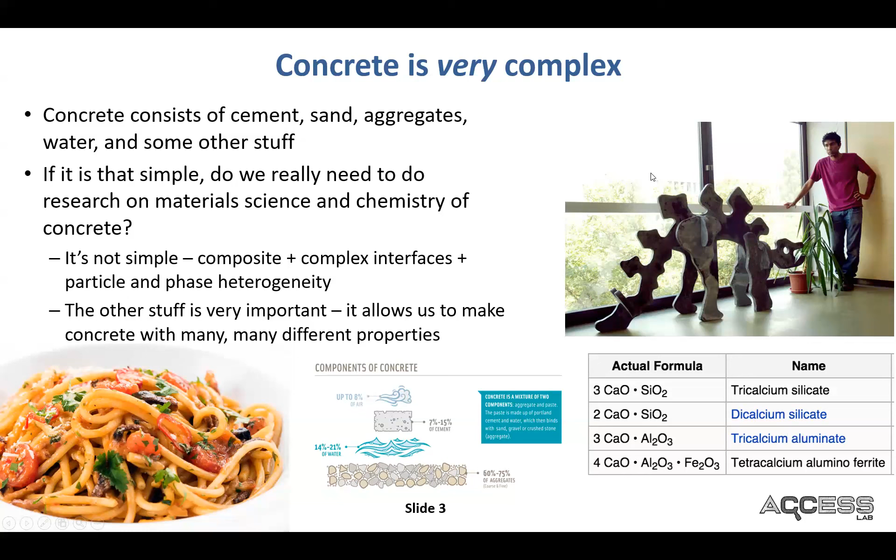The cement, in its simplest terms, is a mixture of calcium silicates and calcium aluminates: tricalcium silicate, tricalcium aluminate, dicalcium silicate, and tetracalcium aluminoferrite. This mixture of calcium silicate and calcium aluminate phases is probably the simplest formulation of cement.

So now let's talk about CO2 in concrete. The numbers I promised I'd tell you about 2 minutes ago: we make about 20 billion tons of concrete every year, and that is an absolutely massive number. And it contributes about 7% of global CO2 emissions.

So the concern that a lot of people have is that concrete is extremely environmentally unfriendly. And this is true, but this is largely because we make 20 billion tons a year of it. If you look at the numbers themselves, the CO2 emissions of concrete are about as low as they can get.

In terms of building materials, the only building materials with lower emissions than concrete on a mass basis are probably straw and stone, right? Cement does have about 10 times the emissions of concrete. And this is interesting because it's only 15% of the concrete by mass, but it's actually responsible for about 90% of concrete emissions.

There are curves like this and figures which are very common in literature, but if you look at embodied CO2 and embodied energy, again, concrete is near the lowest. You can put in 3 dimensions how the cost looks, and again, concrete would come to one of the lowest numbers. So we clearly have a material that's very low in embodied CO2, low in embodied energy, and pretty cheap. So the fundamental challenge here is how can we reduce the cement or replace the cement with something else? That's the key to reducing concrete CO2 emissions.

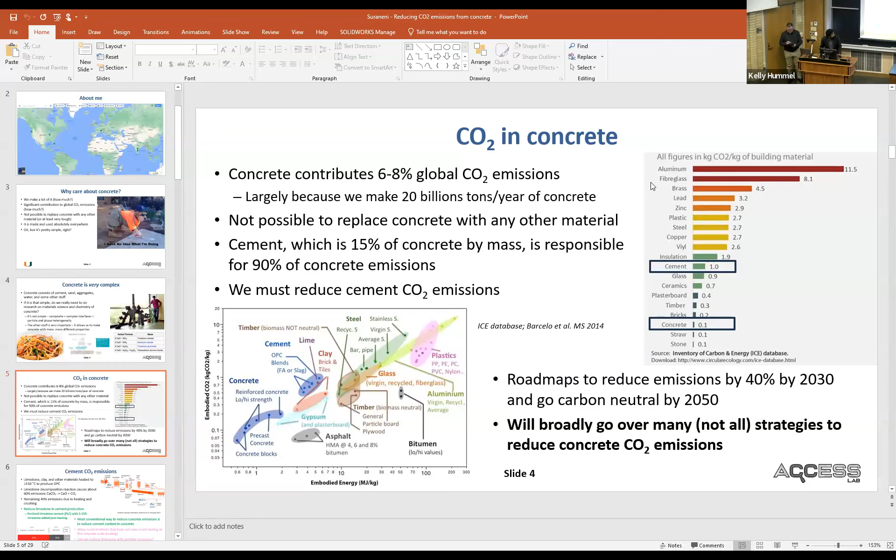So this seems to be echoing just a little bit. Just turn this off? Yeah, let's just turn that off. Okay. All right, I guess I'm loud enough. I was just joking earlier that hybrid is the worst. Maybe we mute here. Are you logged into Zoom as well, or no? Okay, try it now. This should be good now. Loud and clear? We'll take it as it goes. All right. Okay, fantastic. Thank you.

So what I was talking about was that concrete is pretty environmentally friendly, except we make 20 billion tons of it. So yeah, we make 20 billion tons of it, so pretty environmentally unfriendly, but if we can reduce the cement content, we're in great shape.

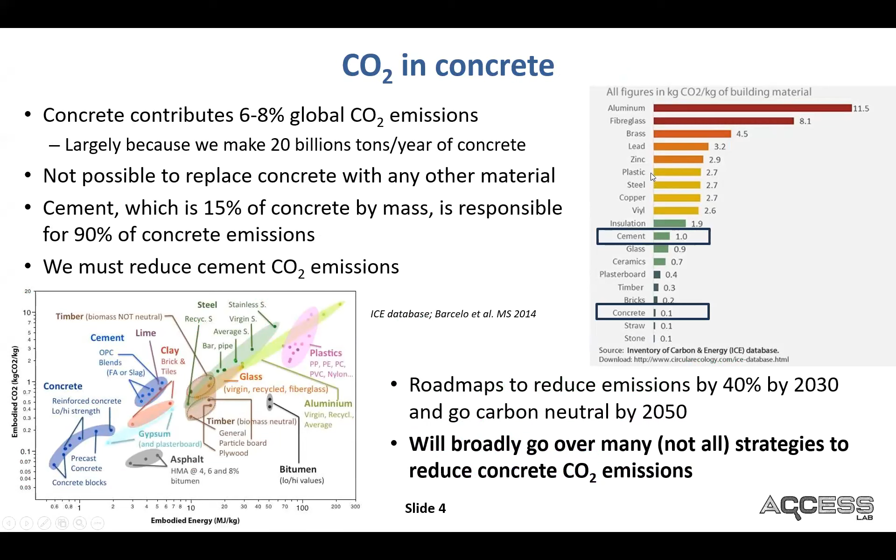So where are the emissions coming from? Cement production is actually very simple. I mean, at least there's been so much research and optimization done on it that it's pretty simple. You take limestone, clay, or other materials, and you heat them up to 1450 Celsius. If you heat limestone to over 900, typically that limestone will decompose and you lose the CO2. And you know exactly how much CO2 that is. It comes out to 44 grams for every 100 grams of calcium carbonate.

So about 60% of the emissions just come from this limestone decomposition step, right? It's not so much that you heated the cement. That is maybe 25-30% of the emissions. The remaining emissions are because of crushing, but 40% are just because of heating and crushing. But the 60%, right, is simply because you use limestone as your feedstock.

So one of the most obvious ways of reducing the emissions is to reduce the amount of limestone in cement production. A very recent technology, 10-15 years old, that has really taken off is what is known as Portland limestone cement, where you add about 5 to 15% of the limestone. Instead of adding it during the heating, you add it post-heating, and this results in about 4 to 12 or 13% emissions reductions. As we mentioned, the most environmentally unfriendly component of concrete is the cement. So if you reduce the cement content, you're good to go.

Now, there are a lot of really great technologies out there. Many of them have the drawback that they haven't been tested at the concrete scale. So we have a lot to learn about how these technologies work, what their chemistry is, what their material science is, what their engineering is. And for the most part, I work somewhere at the intersection of these three topics. So one very obvious question that everyone asks is, okay, that CO2 is not really key. I mean, that CO2 is not doing anything, right?

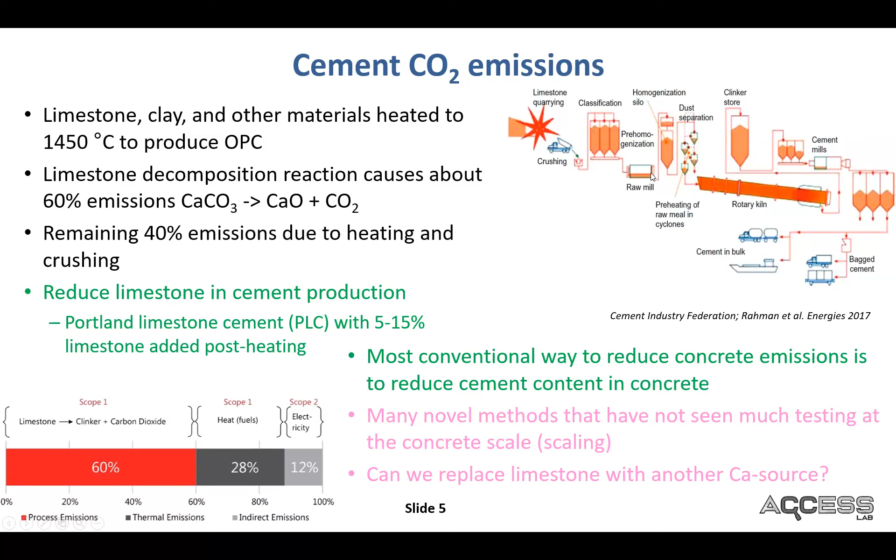So I want to cover these, which I'm going to call standard methods. By standard methods, I mean there isn't any major research or development need here. These are all very well understood in the lab, studied to death over the last 60 years or so, but implementation maybe is not quite there yet. So some of these include, as we mentioned, use of PLC, Portland limestone cement - just replacing 5 to 15% of the limestone instead of heating it up. If you add it at the end, that reduces emissions by about 10%, with really no change in performance.

A major technology is the use of cement replacements, known as supplementary cementitious materials. In principle and in practice, it's possible to replace about 60% of the cement with these. Most of these materials have emissions at most about 20% of cement, so again you get a substantial reduction, up to 40-50%. The nice thing about using supplementary cementitious materials is they improve long-term durability and performance, but there is a drawback in that your early strength is reduced.

You think concrete is all engineering, but actually a lot of nice things can be done in concrete if you're like Snape and you know your chemistry. So this is chemical admixtures - a lot of these are large-size organic molecules that act as dispersants. They could also act as grinding aids, etc. Strategic use of these various chemical admixtures can again reduce cement by another 10%. Typically, these dispersing admixtures have positive impacts on long-term concrete properties as well.

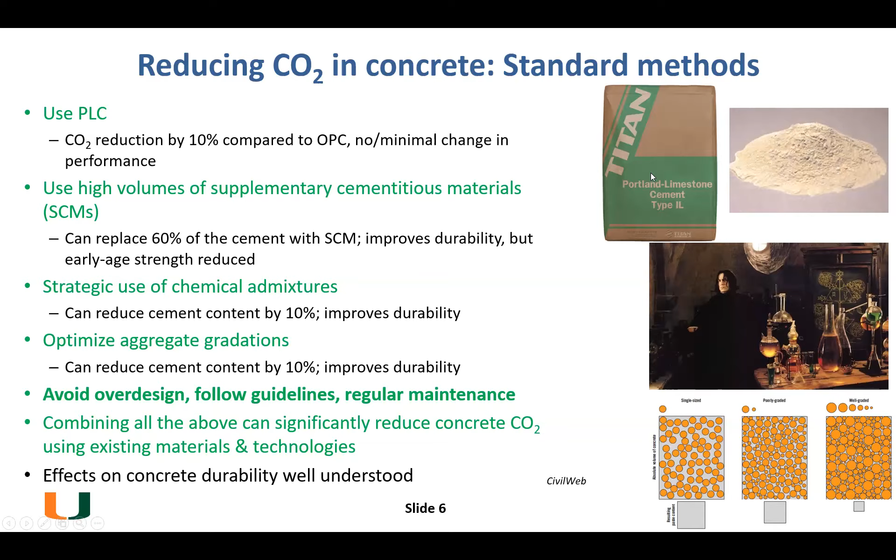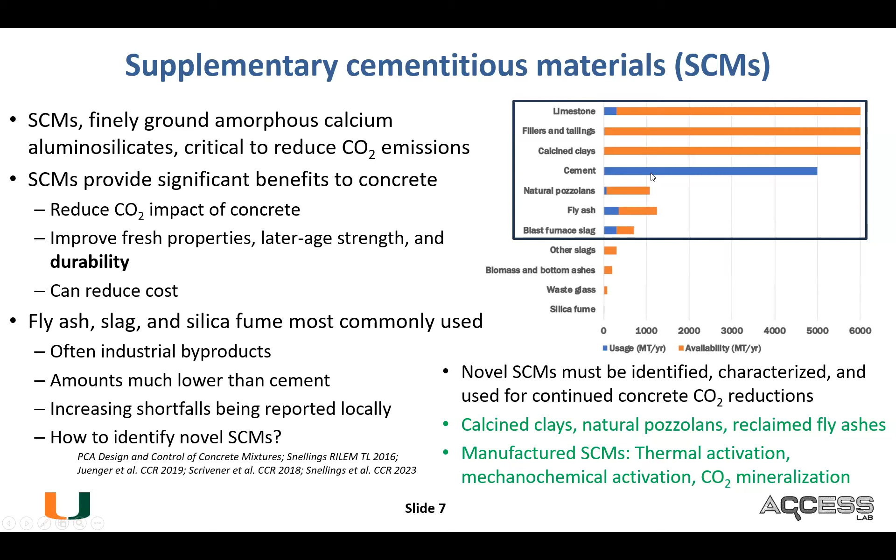For the second part, I'll talk about some technologies, and I'll put a little bit of focus on them. These are what I would call technologies where you need to do a little more processing. These are thermal, mechanochemical, and enforced carbonation techniques. Primarily the use of these is to take materials like fillers and tailings, which are not reactive, largely because they're crystalline, and increase their depolymerization or disorder to an extent which makes the material reactive. In the simplest of terms, it's just putting a lot of energy into the material.

So we talked about reactivity. What's reactivity and why is it important? Cement reacts with water very fast and very nicely. So if you take the cement out and you replace it with 40% of a material that doesn't react, that doesn't do anything, you expect a 40% reduction in performance, right?

On the other hand, supplementary cementitious materials, or SCMs, do something different. They actually have other reactions. They're not the same as the cement reactions. But because of that, if you put in 40% of an SCM, the strength reduction is not 40%. In fact, at later ages, it's probably closer to 10 or 15%. At early ages, it's a little higher. So essentially, these supplementary cementitious materials, as I mentioned, for the most part, are amorphous calcium aluminosilicates.

They're now put at high pH. A lot of people are surprised by this, but traditional cement pH is about 13. You probably should not do this, but if you want, you can look up cement or concrete burn. It's pretty nasty. Concrete will kind of eat into your skin if you're exposed to it for several hours and you don't wash it. It doesn't really happen in the US, but in some poor countries where there's really not knowledge, this can happen. It's really an awful thing. But anyway, concrete has very, very high pH, right? So at pH 13.5, silicate glasses will dissolve.

So that's the idea. These pozzolanic SCMs, that's the first class of SCMs. They react with calcium hydroxide. Largely, they're low-calcium materials. At high pH, they react with calcium hydroxide, and then they form CSH. CSH is calcium silicate hydrate. This is the glue of concrete. This is what holds concrete together. And then the second category is latent hydraulic SCMs. These are typically calcium-rich materials. So they're disordered enough or reactive enough in terms of the phases they have that they actually react directly with water to form calcium silicate hydrate. At high pH, they do not need CH. CH is calcium hydroxide. They can react with the calcium hydroxide, but they don't need it.

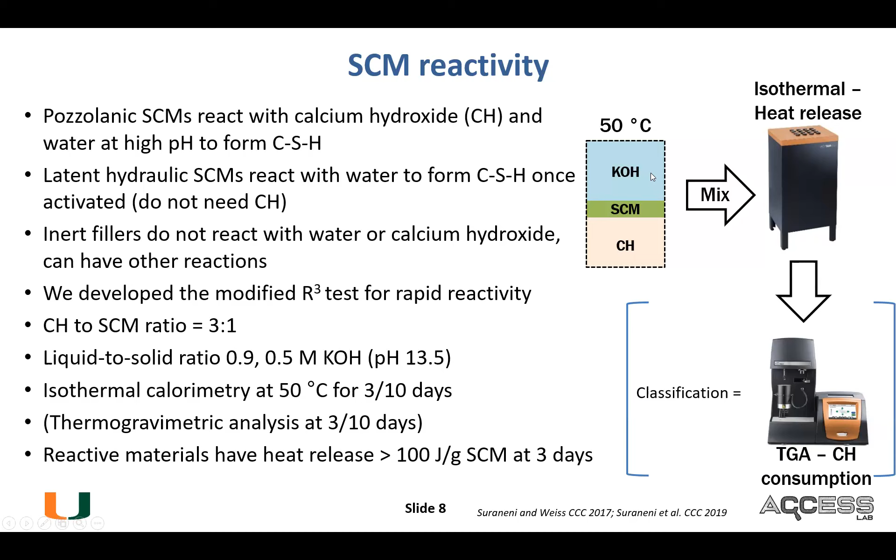So the first thing is limestone calcined clay. The idea is to replace 50% of the cement with a mixture of limestone and calcined clay. The volumes of limestone and kaolinitic clays available are billions of tons per year if you want to get them out. So the technology is easily scalable. Low and mid-range kaolinitic clays are ideal for this purpose. We're talking about kaolin content somewhere from 30% to anything higher than that. Illitic and other clays could also work, but it's a little harder and you need to do a few other things.

So most of the applications so far have been in India and Latin America. I'm almost certain this technology is going to be adapted pretty soon into the US. A lot of cement and concrete companies are looking at it very seriously. And there's really zero R&D challenges.

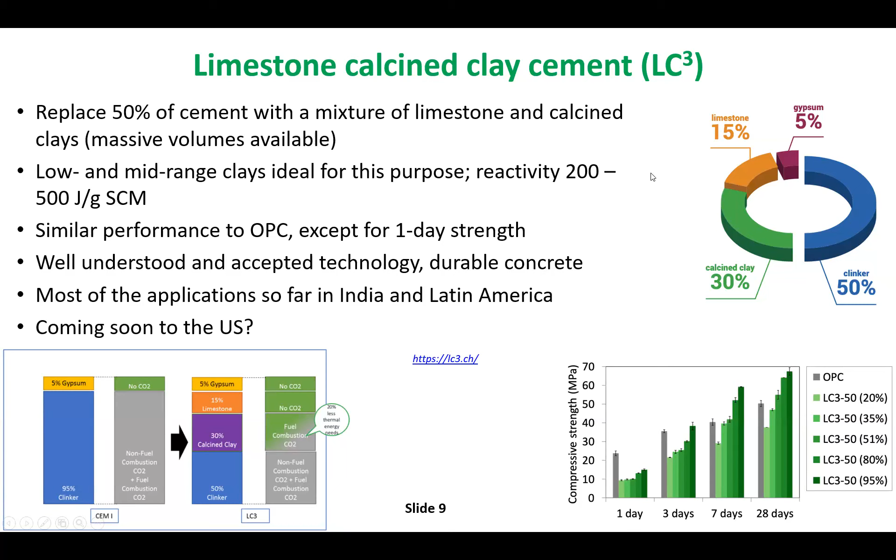All the challenges that are here are extremely applied. Basically, if you give a cement company about $70 million, maybe something like that, they're happy to make this conversion. But $70 million and increased OPEX is a little bit of an investment, but I believe the technology will come. And in terms of emissions, there's a bunch of calculations, but about 40%, a little bit here and there, emissions can be reduced by using this sort of technology.

Now, let's look at thermal activation. So you can take a mine tailing, or you can take a basaltic fine. So fines, these are crystalline materials. And essentially, if you put a lot of energy into them, that is, if you heat them to very high temperatures, and then rapidly cool them, they become amorphized. So the disorder increases tremendously. So you've taken the inert materials and made them reactive.

So this is some data from one of my students where we've done this with basaltic fines. We've done this with some blends as well. And essentially, it shows that if you go over 1200, you consistently get reactive materials. Now, why is this important? This is important because we have basalts or mine tailings, many millions, if not billions of tons of these materials available. And to a large extent, because we don't necessarily have high volume applications that can generate some revenue, they're just landfill. So you get the materials out of the landfill and you make a product that has some use and some value. Maybe these products are something that could be sold at $150 per ton, etc.

The process is not zero CO2. Obviously, there is some CO2 associated with it, but it's significantly lower than cement. And if you're running out of SCMs, you don't really have an option. So what is happening? Well, at high enough temperatures, you get bulk melting and subsequent amorphization. We've confirmed this using XRD and FTIR, and you can see in the XRD curves that beyond a certain point, all the peaks vanish. FTIR also shows peak broadening. And the reactivity is generally similar to fly ash or natural pozzolans.

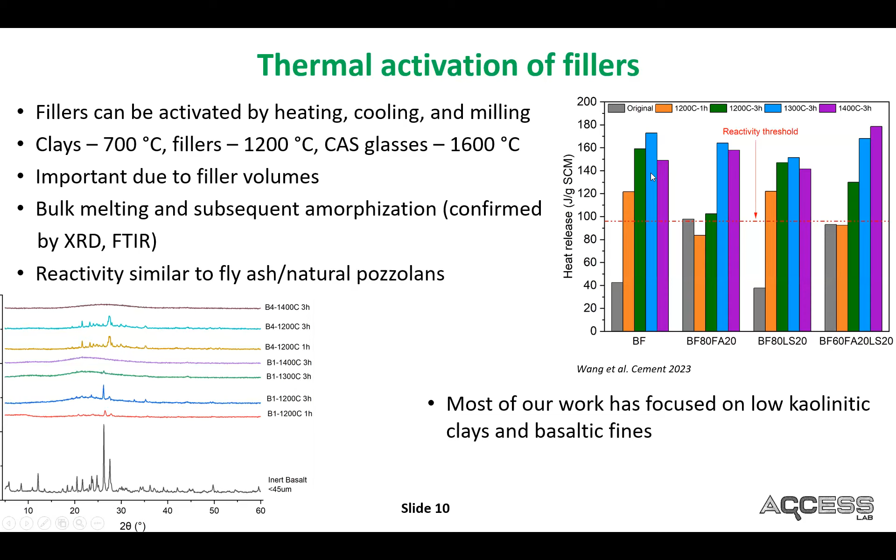So what are the unanswered questions here? This is not an idea that a lot of people have done a lot of work on. There's not a lot of research and data available. What is well known is if the temperature is high enough, it works just fine, right? Now, can you reduce this temperature? Really, heating up something to 1200 Celsius is not optimal. So can you make it lower? So here are some studies from our group, which basically show that for the basaltic fines by themselves, you have to heat them up to 1200 and cool them to get appropriate reactivity.

But if you add about 5% to 8% of some material, which I won't tell you what it is, most of you can probably figure out what it is, what happens is that we get the same reactivity, or at least more than threshold level reactivity, at 800 Celsius, right? So we have now reduced the melting temperature by 400, and I put melting in quotes because melting in glasses is a little bit complicated, especially in these heterogeneous systems. The interesting thing here is, again, those of you who know ceramics figure that this is actually very obvious. The challenge is not in reducing the temperature. The challenge is in actually understanding what is happening. What are the mechanisms of the melt itself, right?

Are we forming some sort of a core-shell structure where only the surface has melted? Is it a homogeneous melt, or is X kind of distributed in random locations and other stuff have come out of the melt? Or is it that only the finest particles, or maybe particles with very, very specific compositions, have melted? So those are the questions, and we cannot answer those simply by using bulk averaging technologies such as X-ray diffraction or FTIR. This needs a lot more work, very careful SEM, FIB, Raman, and more advanced technologies. So that's something we're working on.

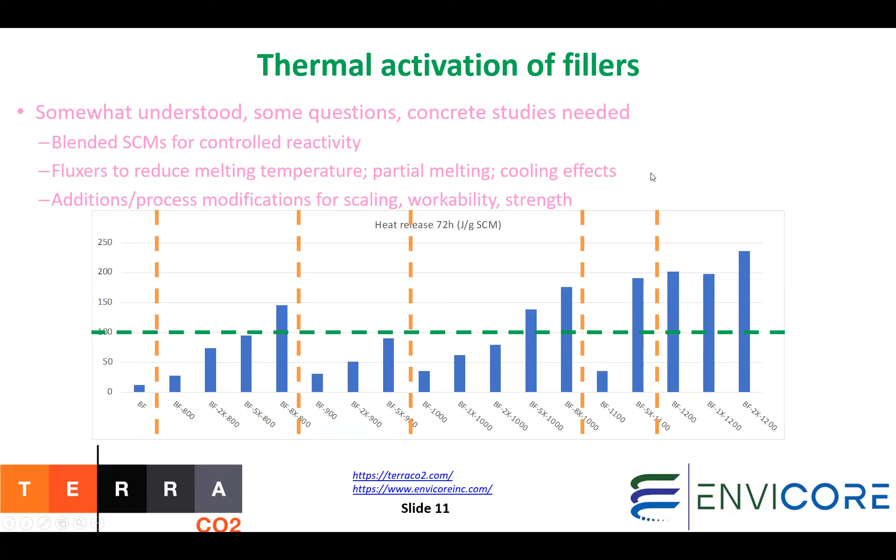So all through my presentation, I've named a bunch of startups. It's not an endorsement of the startups, but essentially, I just want to identify some of the folks that are working in this space. Terra CO2 and Envicore are using some sort of a similar technology to what I talked about. And you can certainly go look them up, talk to them, etc. Terra CO2 is actually pretty close to where we are. So if that's what you're interested in, you can do that.

Now, the second topic is mechanochemical activation. And mechanochemical activation is putting in enough energy into these crystalline materials to cause a lot of defects or to cause amorphization of the surface. And this comes about because of the friction, because of the impact, because of the high temperature that you have when you smash things together.

Most studies in literature use what is known as a planetary ball mill. It's not your conventional ball mill. A conventional ball mill is just this, right? But a planetary ball mill is more, this. I'm doing a bad job of that, but hopefully the figure does a better job. Basically, there's a counter rotation, and this actually causes a lot of tumbling action, a lot of heat, etc. So pretty high energy, and also, typical ball mills, for those of you who are aware, rarely go over 100 RPM. These go 400. I've seen higher ones as well, but the RPMs are about 4 times higher.

So fillers can be activated essentially by high energy grinding as well. We've looked at a lot of basaltic fines. We've looked at mine tailings. We've looked at clays as well. And we've actually demonstrated mechanochemical activation for 10 plus materials. Again, you get similar reactivity to fly ash or natural pozzolans. And here, the phenomenology is a little bit different. So we get increased fineness, right? We also get amorphization. But this amorphization seems to be very different from the bulk melting case, where it only really seems to be at the surface, right? But also it seems to be very, very phase specific.

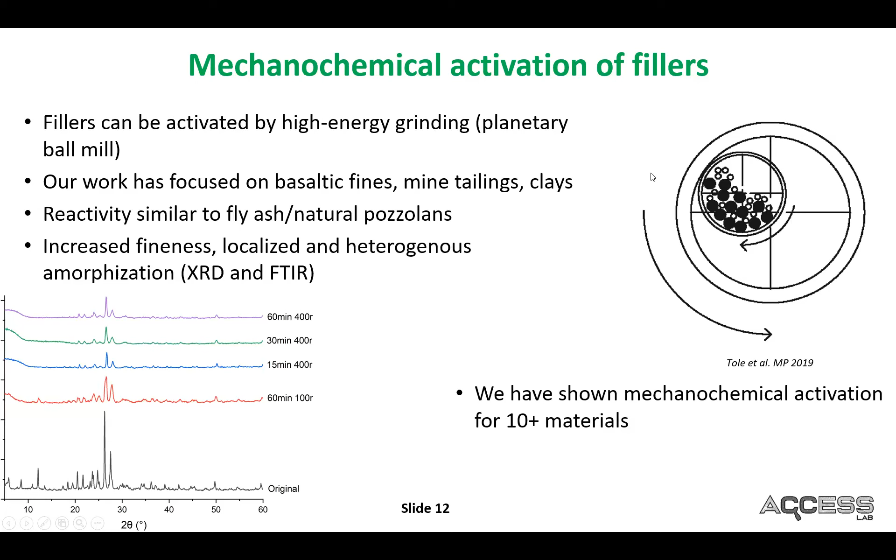And this probably has to do with original fineness, original particle size, things like that. So the fundamental question here, but also for a lot of other technologies and efforts that I'll talk about, is how do the precursor properties influence the processing parameters and the processed material itself? I use precursor kind of loosely, the chemists will probably shout at me. So it's essentially elucidating the processing-structure-property relationships in these materials, but there's a very strong effect of the precursor properties in these relationships.

So this is not really a very well understood process, at least for cement-based materials. There are many questions. I actually haven't seen almost any concrete studies on something like this. Most of it is looking at small batches, small scale, hundreds of grams of stuff. And by the way, I get people calling me all the time and saying, hey, we have 20 grams of material. Can you make concrete with that and do some testing? And the answer is no.

You're not going to do any concrete testing unless you have at least 10 pounds, but probably closer to 40 pounds of material. That's probably the minimum amount you need to actually do any concrete testing. So you can have the nicest technology in the world, but if you're only manufacturing a few grams of it, concrete testing is some time away. For this technology, for example, we can't really make concrete because we only make about 200 grams every 15 minutes. So far, we haven't even made concrete, which is similar to what most of the others are doing, or not doing.

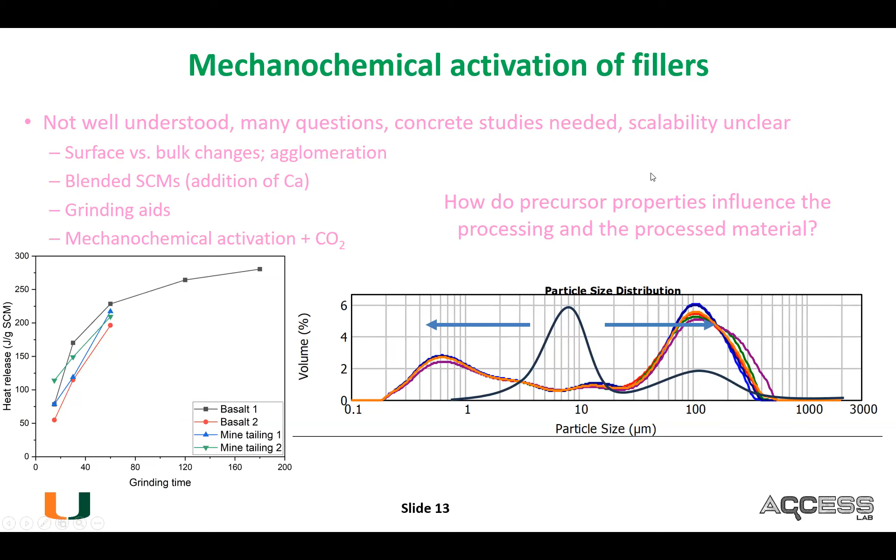It could basically be because you have almost some sort of sintering effect, because the temperatures do go high. Or, we've looked at the electron microscope, and what you see is large particles, but they're not that large. The problem is it seems to be a large particle with a bunch of small particles stuck to it, but then there's another large particle also stuck to it. Now, how easy or hard it is to disperse these particles would have a major impact, because to a certain extent, maybe that's exactly what you want. If initially that's the state of the particles, then you get an improvement in workability. But then later on, if they actually do dissolve, or the surface area is high enough, we have an advantageous situation. In fact, in several of these cases, we've seen that the median particle size increases and the surface area increases at the same time. So there are some interesting synergies here that need to be solved.

So now the next topic I want to talk about. The first section was really talking about processing of SCMs, etc. The second is about enforced carbonation or CO2 uptake. And somewhere right in between is going to be a processing technique for SCMs using CO2.

So all concrete carbonates, it's pretty inevitable. And if you think about the manufacturing process, you put in a lot of energy to get the CO2 out, some of it is ultimately going to come back in. That is pretty obvious. The process is generally pretty slow and is pretty limited. Calcium and moisture are key to this process.

There have been many, many papers that discuss what this uptake comes out to. The ones that I've seen generally agree that about 10% of the total CO2 emissions that you make from concrete can be regained over 30 to 50 years simply by doing nothing. You just have the concrete, it's slowly sorbing the carbon. It's not sorbing a great amount, but because there's, I don't know, 300 billion tons of concrete out there, it's going to keep on taking in carbon.

Now, there are many ways of mineralizing carbon in concrete. For the most part, the material you form is calcium carbonate. There are many cases where you form magnesium carbonate. I'm not really going to discuss that, but magnesium silicates are very interesting as well. It's not something I've worked on myself. But basically, when you do the carbonation, it could be completely dry, you could have a little bit of water, or you could almost do it in a slurry state. Pressure and temperature can be greatly varied. The purity and the concentration of CO2 can be greatly varied as well.

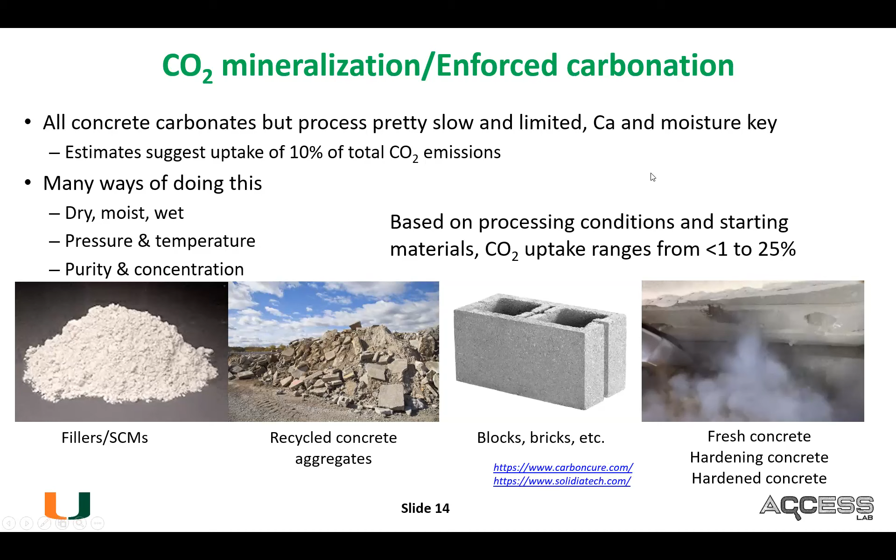Now, the first technology is forced carbonation of fillers or supplementary cementitious materials. So the same materials that I talked about, like fly ash, for example, you could just take the fly ash as is, just in a powder form, and expose it to CO2, and it will uptake some amount of CO2. The key to having a high CO2 uptake is to have high calcium and magnesium. But of course, it needs to be in a form that will actually react, because if you just take calcium carbonate and expose it to CO2 without doing anything else, absolutely nothing will happen. But if you take these high calcium and magnesium materials, if the calcium is, as an example, calcium oxide or calcium hydroxide or calcium silicate hydrate gel, they will carbonate.

I've seen studies in wet, moist, and dry conditions. But the dry typically is combined with some sort of milling or grinding process as well, like I've described earlier. So the precursor and processing heavily influence the CO2 uptake. Anywhere from 1 to 25% is possible. And also, at least in some cases, remember we talked about supplementary cementitious material reactivity. It does seem possible that after the carbonation, the reactivity increases a little bit. This could be because in some cases you form aluminosilicate gel, which is essentially amorphous silica or amorphous aluminosilicates. That's pretty reactive. Calcium carbonate also has some reactions in concrete, which makes it useful. So it could also be just that your original SCM phases are reacting.

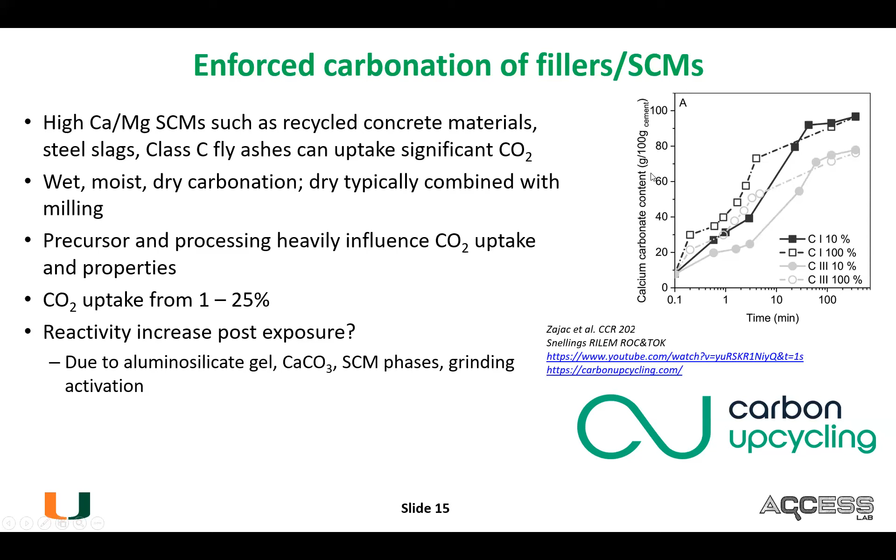So what does this look like? If you take a fly ash, this is basically the fly ash at 1 day. This is the fly ash at 3 days. And then this is the fly ash with just the mixed water. Typically calcium carbonate decomposes at about 600 Celsius, though there's a lot of variation in that. You see that the original material already has maybe a little bit of a peak here. Maybe it's an artifact, it's really very small, or maybe there's a little bit. And then at 1 day, this peak increases, as you can see here.

And then at 3 days, the peak increases significantly. But also, this is a little interesting because you almost see 2 different peaks here. So presumably, we formed 2 different kinds of carbonate. Maybe it's magnesium carbonate, or maybe it's some sort of amorphous calcium carbonate. Either way, you can actually calculate what the CO2 uptake is.

And people are surprised because they look, oh, this is a huge drop. I mean, it actually really isn't if you take a look at the numbers. This is only equating to about a 3% CO2 uptake. So there are obvious questions, right? Is it worth it to do this for 3% CO2 uptake? Maybe, maybe not.

On the other hand, this is a recycled cement paste. By recycled cement paste, I mean you mix cement and water, okay? And then once it hardens, you grind it to some sort of a 15, 20 D50, and then you expose it to CO2. So this one has a lot higher CO2 uptake.

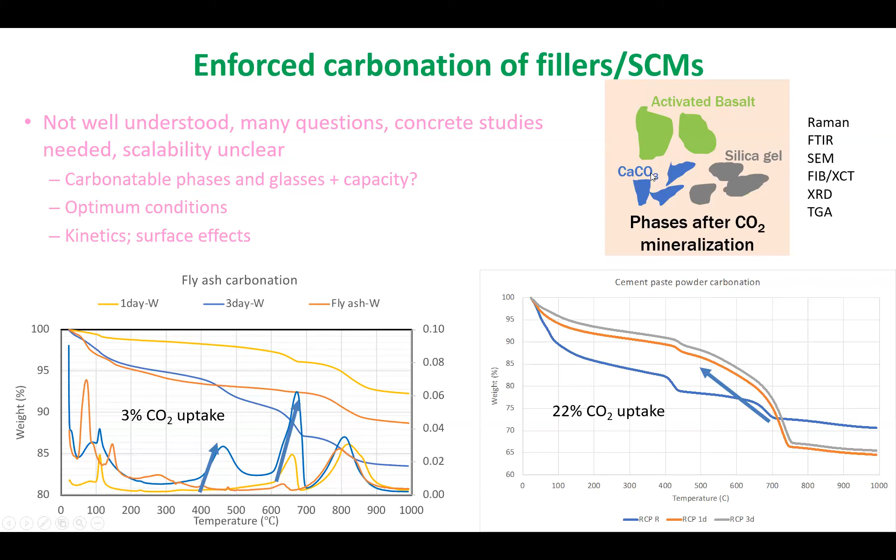So we've done a little bit of work. I mean, most of the materials, as I said, have 5 to 10%. We are trying to understand a little bit more now about the phases. The problem is, if you think about it, quantitative XRD is a fantastic technique, and it'll tell you exactly what's happening. But you already, in many of these systems, have 7 different phases. After carbonation, you form 2 more phases, right? Most of these techniques don't work when you have 9 phases which are heterogeneously distributed. So that's one of the reasons why we are interested in looking at pure phase glasses.

So you can also take the recycled concrete aggregate and carbonate them. And this has been studied for a number of years. There are really no R&D challenges. You can take any sort of recycled concrete aggregate. You can also take lightweight aggregate. Almost everyone just does moist carbonation, where you add a little bit of water. The exposure duration is a few hours to a few days.

For the most part, the CO2 uptake in this is maybe about 1%, 1.5%. Others have claimed higher numbers, and some are speaking very high numbers, so I don't know how that would be possible. In recycled concrete aggregates, you can think of aggregate with a thin coat of cement paste. So maybe they do some sort of separation technology where they remove all the cement paste, and then they separate out the aggregates, and then they expose the cement paste to CO2. I guess that could be possible. But anyway, those sort of more applied questions, there are a few of them.

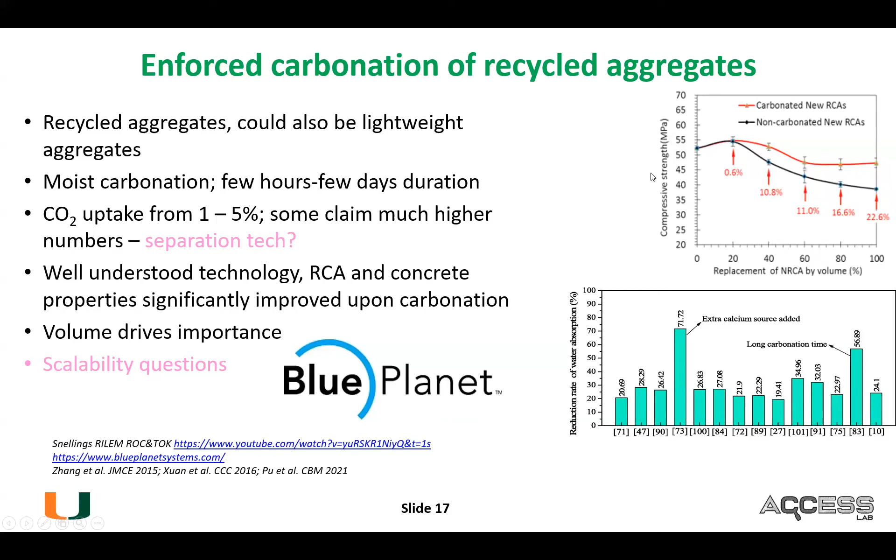But the advantage of this, even though the uptake is very low, is that recycled concrete aggregates do not have the best properties. They absorb a lot of water. They're weak in strength, etc. By carbonating them, a lot of data has shown that you improve the properties, you improve the strength of the concrete, you increase the water tightness of the concrete, etc. And it's important because, of course, 80% of your concrete is still the aggregates. So if 80% of it has 1%, that's still a pretty decent number. So most of the questions here revolve around scalability.

There's also CO2 cured concrete products. So one way of doing this is to take your normal fresh concrete and just inject a blast of CO2 into it. The uptake in this case is really pretty low. It's maybe 1%, maybe even less than that. And the claim from the startups has been that you can actually reduce your cement content by about 5% because of the formation of nano calcium carbonate phases, without actually reducing the concrete performance. So the reduction of emissions here is not so much because of CO2 uptake, it's rather because of reduction of cement content.

The second kind of technology is, as the concrete is hardening, you inject CO2 into it. And this could be concrete bricks, blocks, pavers, other products. In most of these cases, if you're using just standard concrete materials, again, the uptake is very low, less than 1%. But if you're replacing standard concrete materials with carbonatable clinkers, for example, or steel slags or recycled concrete materials, etc., in this case people have actually reported higher CO2 uptakes, in some cases up to 15%. For the most part, unless you have like 15% CO2 uptake, the performance is pretty similar to conventional concrete products. You don't really need to make a whole bunch of changes.

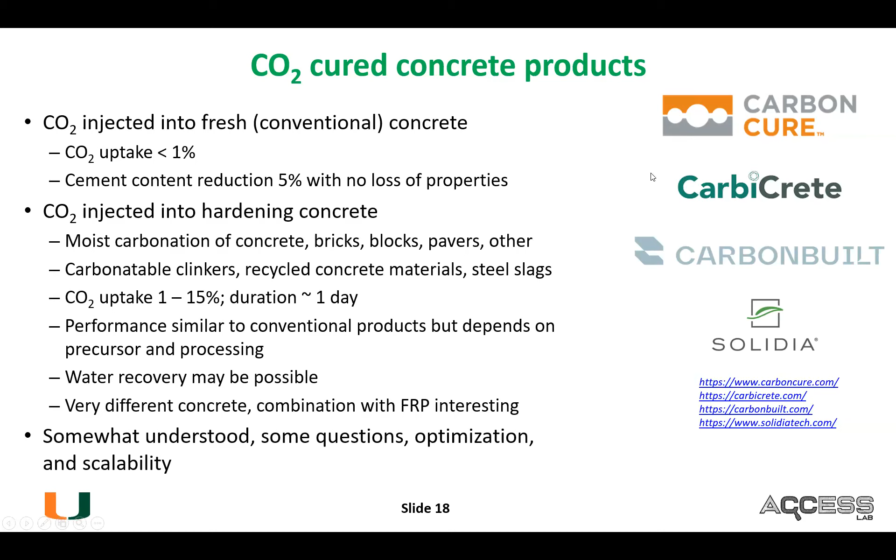A couple of the questions here are interesting. So you can take a concrete block, CMUs. I think everyone has seen concrete masonry units. And these carbonate very rapidly, okay? We've actually been able to carbonate some of them, thick sections, by the way, in 4 hours, right? This is fantastic. It's uptaking a lot of CO2, right? Well, maybe not. So that test is basically a phenolphthalein dye test. And essentially, it's a pH indicator, right? So the white portion is telling you that the concrete has carbonated, or the pH has dropped really, so the CO2 has gotten in. That is correct. But the amount of CO2, we couldn't even measure. I mean, 1% uptake is a different story, but this was not even detectable.

And it has as much to do with the limitations of some of the techniques that they're using. But very, very small uptake. So, is it possible to increase both the depth and the CO2 uptake? Maybe you'd have to use a lot of calcium-bearing materials. And some people are working on that, primarily using steel slags.

And then there's actually a major question that revolves around the measurement itself, right? NIST is doing a lot of this work, far more than me. But looking at the concrete and saying, hey, it's not pink, it's carbonated, is something people would have done 200 years ago. So can we do a little bit better? But we still have to do it rapidly. So maybe embedded sensors are the answer. Maybe you need to do some nice Raman, a lot of questions.

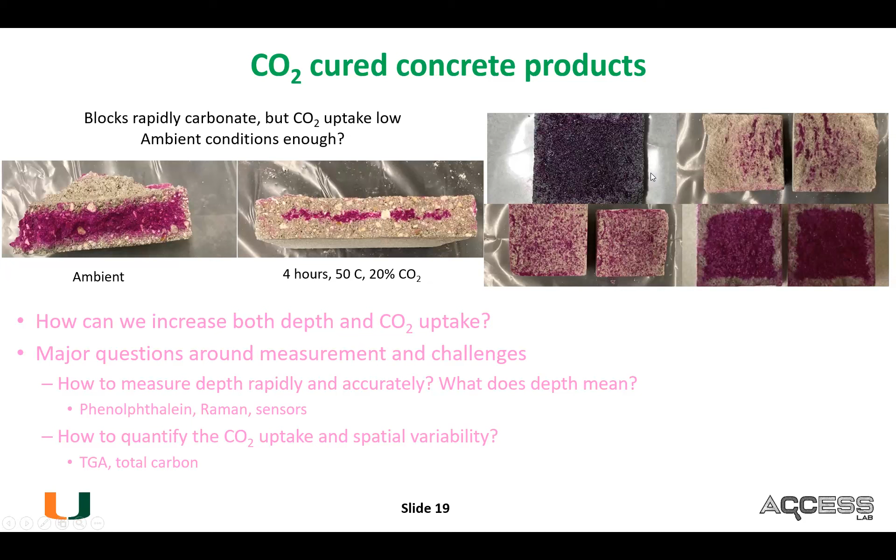So moving on from carbonation, as I mentioned to you, it's entirely possible to develop completely new cements. All of these systems basically say, hey, look, forget limestone. We're not going to heat any limestone. We're going to do something else. Could be electrochemical, could be chemical, heating, various other processes. So chemical engineers, this is where they shine, right? So you primarily avoid the heating step of the limestone. And most of the folks that do this use calcium silicates, magnesium silicates, aluminosilicates as their raw materials.

And this is the wild, wild west where carbon negative is often claimed, CO2 is often claimed. Not a lot of details are available as to what these folks are doing, which is not surprising because when you have technology that could change the world, maybe publishing is not your priority. So if you do want to, you can reverse engineer some of their stuff by looking into the patents. I prefer not to do that, but there are many people who do that. And you can understand how some of these technologies will work if you look into the patents. Bottom line is a huge amount of research is into the mechanisms here.

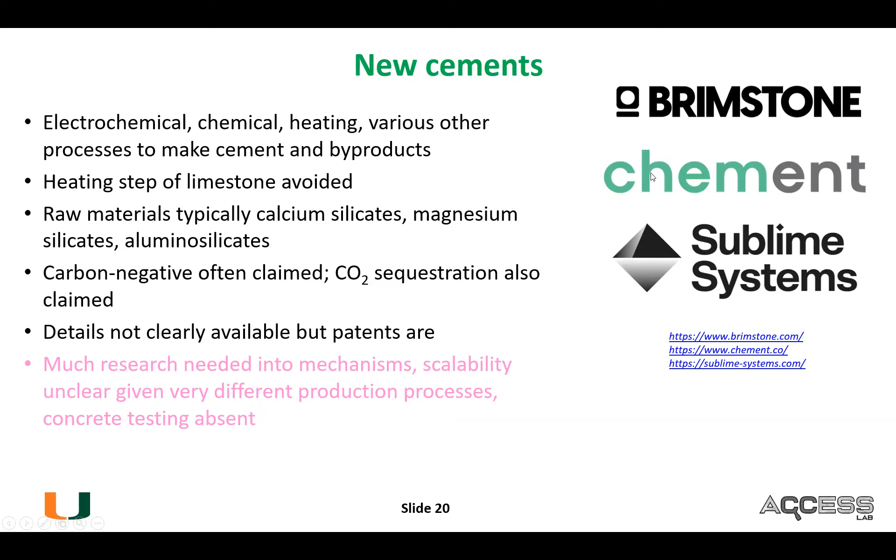Almost nothing is understood about how these materials work; the processing-structure-property relationships of these materials are not understood. Concrete testing at least is very limited, and in some cases, folks may not even have made enough material to make concrete, right? So I don't know if you've been following the news, but at least a couple of these startups have received certification, which means they can actually, in principle, sell material. So exciting times ahead, right? They could actually be selling their materials. We're making a lot of progress with them, but there are many questions.

And philosophically, I always have this question. If you call the new startup Cemex or something, Cementex, it's going to cost $1 billion to build a completely new plant that's going to make you several million tons of cement a year. Or, as I mentioned to you, to convert any existing cement plant into LC3 is probably about $70 million. So if you put in 1 billion, the volumes that you're affecting are much greater. So which of these is better? In reality, we probably have to use both of these technologies. We need to get anywhere to carbon zero, but something like this is important.

And then there's also the question of, we struggle to predict the long-term properties of normal concrete, right? How do you predict the long-term properties of these new cements, or rather the concretes made with these new cements?

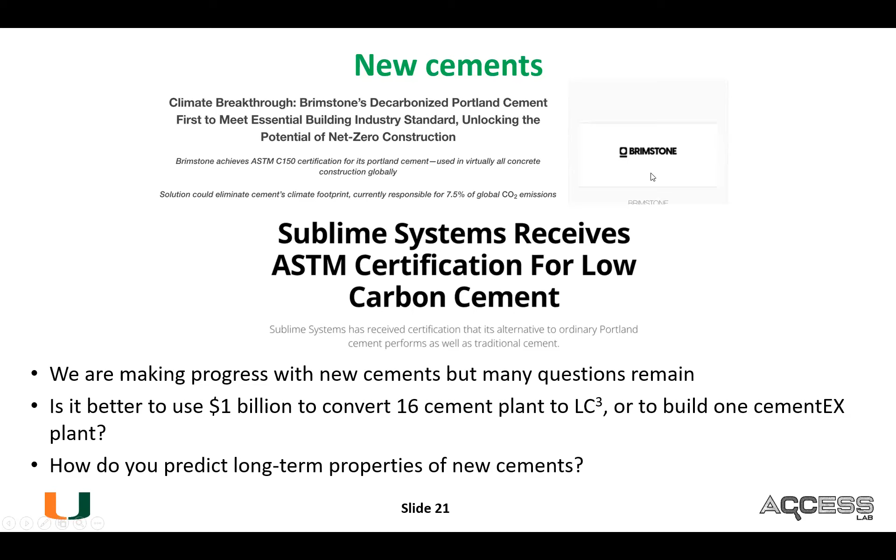So in case you haven't had enough of approaches, there's actually a lot of other things as well. Luckily for you, I won't get into the details. But people talk about bio-based cements, calcium carbonate cements, and then there's alternative cements like geopolymers, which have been around for a long time, calcium aluminate cements, etc.

There's also carbon capture that people can build into cement plants. Lots and lots is happening. So watch the space, and some news about the world's first cement carbon capture facilities there in case you're interested. Prometheus Materials, by the way, is from CU Boulder, in case that's something you want to check out.

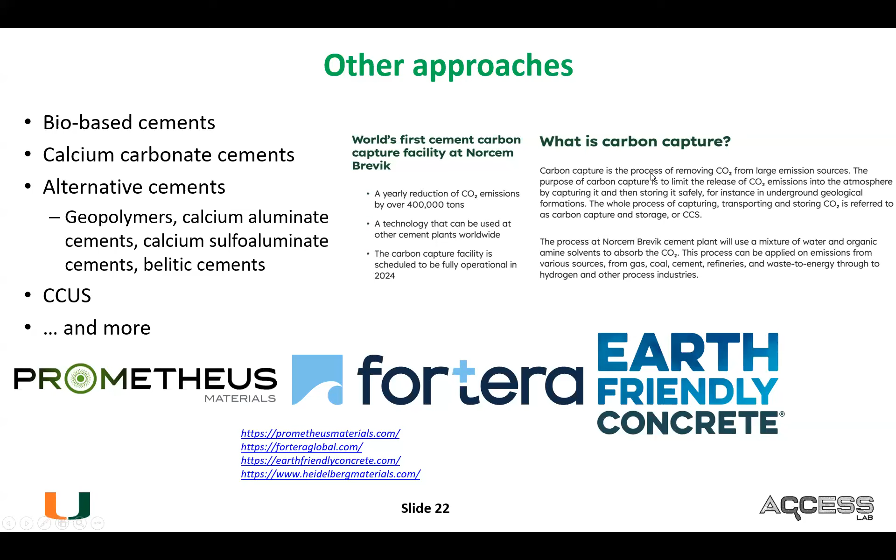All right, so those were all the approaches. And in each of them, I kind of try to highlight the research need, or I kind of dismissed it as, oh, we understand everything. Hopefully we do. But anyway, what else do we need? So I'll only talk about two things. One is model systems and synthesis.

A lot of civil engineers run the moment you say synthesis, but for me, in my opinion, this is one of the most important missing pieces here. That is that cements, SCMs, and concretes are incredibly heterogeneous, complicated. Really, nobody wants to study something that has 25 phases or 10 phases in it, right? You get far more fundamental information. Specifically, the processing structure property relationships can be elucidated for properties like hydration, carbonation, admixture interaction, organic admixtures, whatever, if you simply make simple enough model systems.

So instead of the cement, alite is actually a very nice model system, or a mixture of alite and tricalcium aluminate and calcium sulfate. Hendrik Heinz at CU Boulder has done a little bit of work on such model systems. Cement model systems have received some study. There's far lesser study on SCM model systems. So as I mentioned to you, the calcium aluminum silicate glasses, you can actually synthesize these. The method we use to synthesize is just heat them and cool them. Not trying to mimic industrial practice, but that's how you can synthesize these materials.

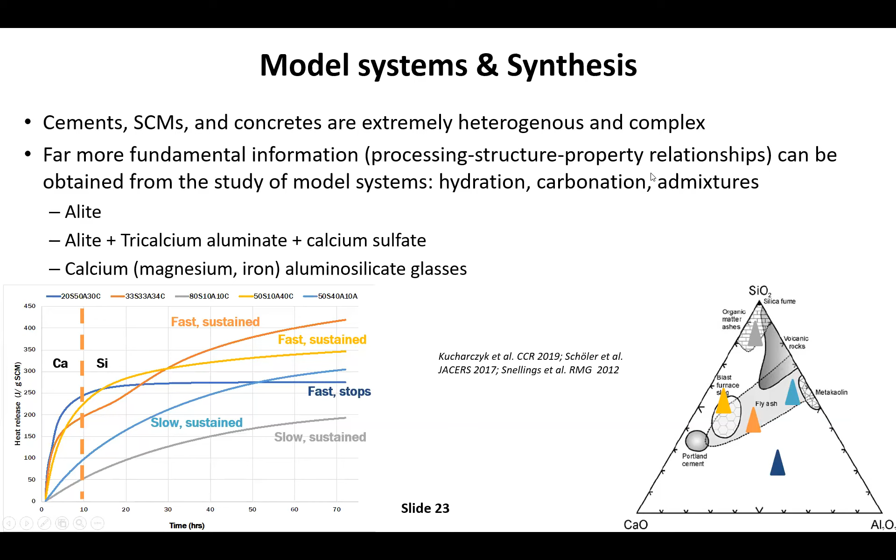So, and that actually brings me to the second thing, which I think is extremely important, which is modeling. So civil engineers are maybe a little slow to take to modeling, but you can get an incredible amount of information by using thermodynamic, AI/ML, or MD and KMC. Increasingly, there's been a good amount of thermodynamic modeling on this, a decent amount of AI/ML, and a few dedicated researchers who do MD and KMC. But many of them, especially in the last case, the folks doing MD and KMC, molecular dynamics, by the way, and kinetic Monte Carlo, don't necessarily integrate that with experiments because it's not that easy.

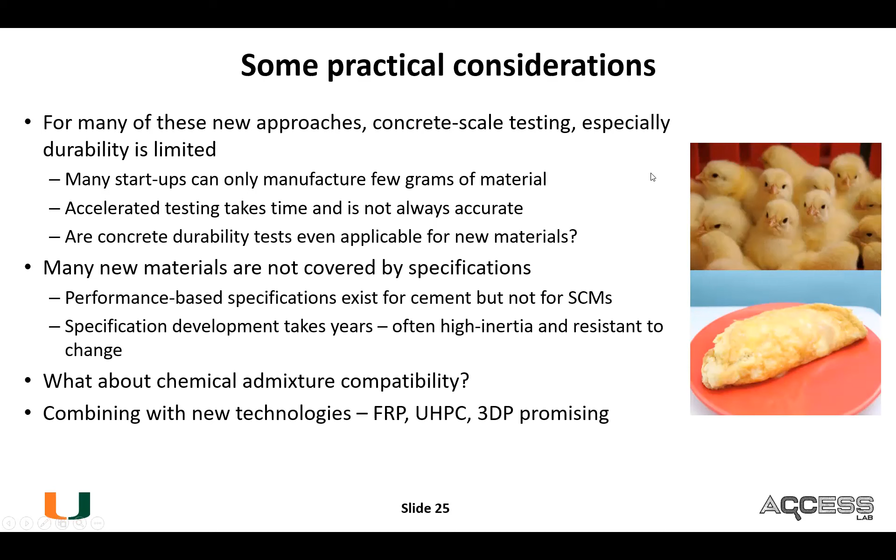And then we have not talked at all about what happens. A lot of the way that you control concrete properties is by using chemical admixtures. How do any of these new products integrate with chemical admixtures? And there are all sorts of other new technologies: fiber reinforced polymers, 3D printing, ultra high performance concrete. These are well understood technologies for concrete that have been very promising. So can you combine all of these low carbon cements, SCMs or carbonated materials with these technologies? That is also of interest. So to summarize, we really need a lot of fundamental interdisciplinary research.

Primarily, the areas that I would identify with respect to manufactured supplementary cementitious materials and CO2 are thermal and mechanochemical activation, and CO2 mineralization for SCMs and new cements. For others, I think the research needs are a little more applied. A lot of this has to come from chemists, material scientists, and chemical engineers as well. A lot of this work needs to focus on model systems and modeling approaches. Durability and long-term tests are needed.

And then a very important question is, maybe this technology is wonderful, but maybe it doesn't scale at all. Maybe you increase the price by way too much, or maybe over the life cycle your emissions increase. So quantifying these at the system scale is extremely important. In general, there are a lot of challenges with accurate measurement and quantification of carbon in these heterogeneous systems. Specs and specification changes are also needed.

Education is just as important. We already talked about how education was a barrier even for existing technologies. As you can imagine, for new technologies, it's even more important. And then synergies and integration with other technologies are not understood. And this has absolutely nothing to do with any of this material.

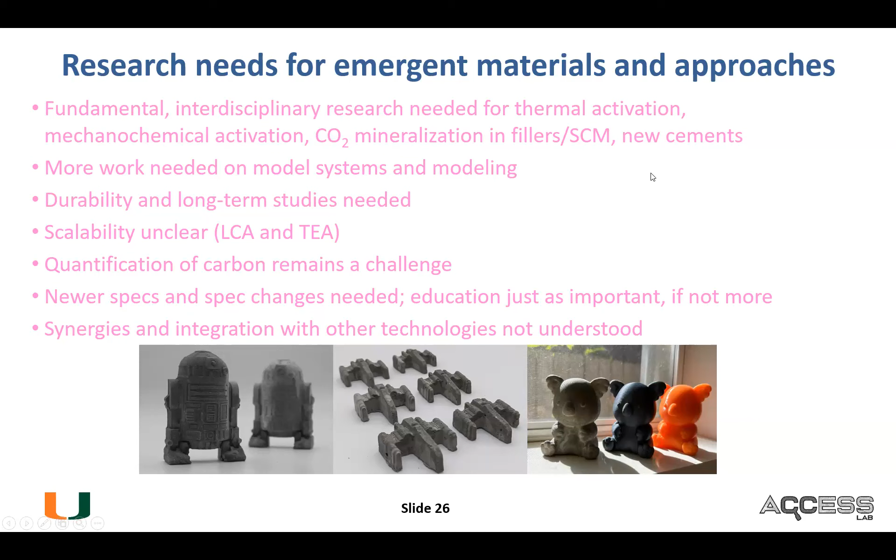It's just that we often have middle and high school students or undergrads come to us, and we have them play around and make small concrete Star Wars or Halloween pieces. This is our way of educating very young folks about concrete. Maybe some of them decide, oh, you know what, this is what we're going to do. Fingers crossed.